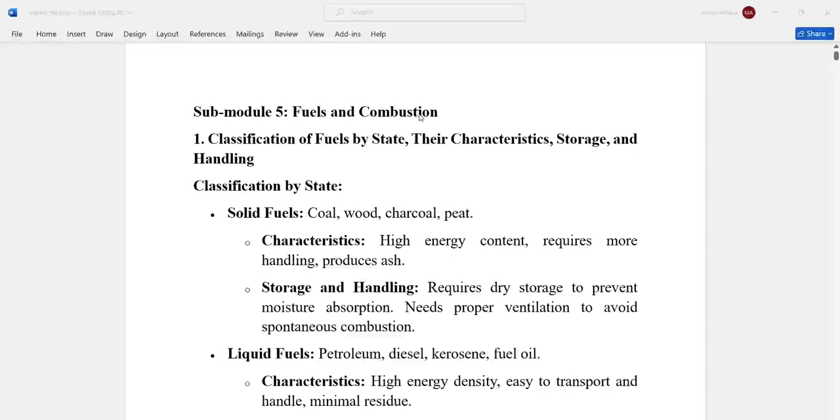Now we are going to discuss fuels and combustion, as an introduction to sub-module 5. By the end of this lecture, everyone should be able to understand what a fuel is, what combustion is, and how to differentiate between solid, liquid, and gaseous fuels. You should also learn how to calculate the enthalpy of formation, how to determine the amount of air required for complete combustion of a fuel, and how to determine any excess air that did not take part in the combustion. I believe everyone will enjoy this.

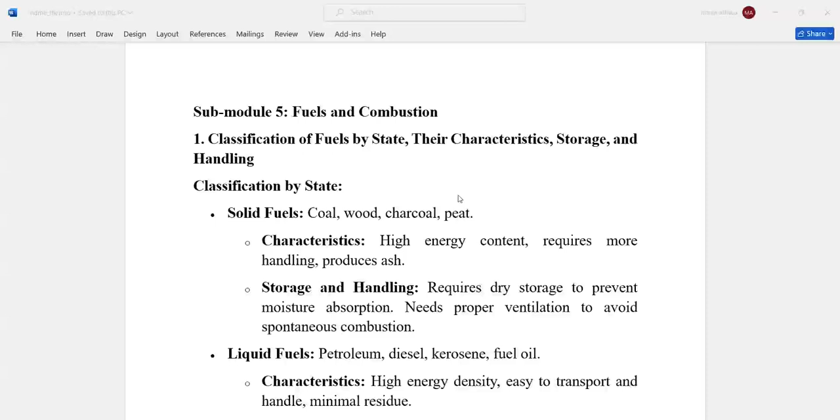Classification by state: first, solid fuels, which include coal, wood, charcoal, and peat. The most common to you are probably wood and charcoal. The characteristics of solid fuels are that they have high energy content, they require more handling since they come in large quantities and become bulky, they require a lot of space to store, and they also produce a lot of ash.

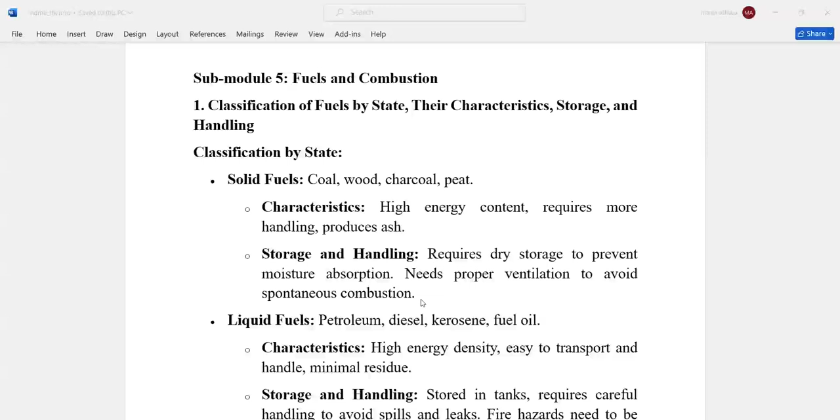For storage and handling, in addition to what we've said, solid fuels require dry storage to prevent moisture absorption, and proper ventilation to avoid spontaneous combustion.

Let's look at liquid fuels. These include, but are not limited to, petroleum, diesel, kerosene, and fuel oil. What is common to you is probably petrol and diesel, kerosene used in lamps for heating and lighting, and diesel and petrol running internal combustion engines for driving or propelling automobiles.

The characteristics are that liquid fuels have high energy density. They are easy to transport because you can put them in cylinders or containers and transport them over longer distances. They also have minimal residues compared to solid fuels, because solid fuels produce a lot of ash, but with liquid fuels like petrol you rarely find residues, except maybe carbon monoxide or black particles left around exhaust pipes of automobiles.

For storage and handling, you can store liquid fuels easily in tanks, but they require careful handling to avoid spills and leaks, which would pose threats of fire outbreaks, thereby destroying property and losing lives.

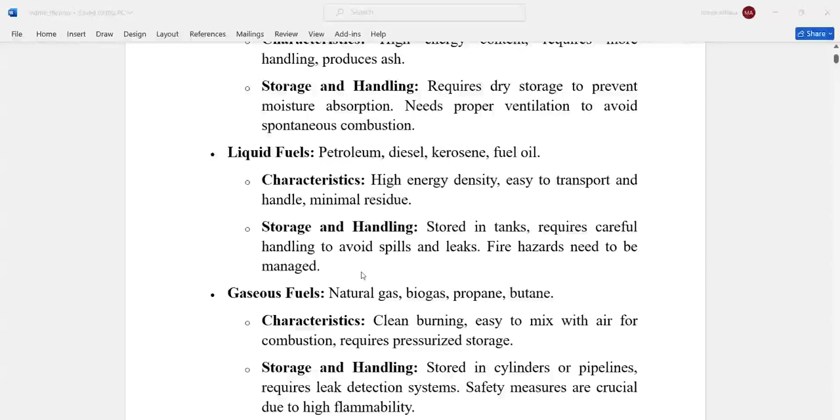Then gaseous fuels, still under classification by state, include natural gas, biogas, propane, and butane. Natural gas, in most cases, is methane, and the liquefied petroleum gas you always use for cooking is one of the gaseous fuels.

Then butane and propane, which we shall see ahead. They are alkanes, belonging to a group of hydrocarbons called alkanes, and we will see how you can differentiate them from other hydrocarbons.

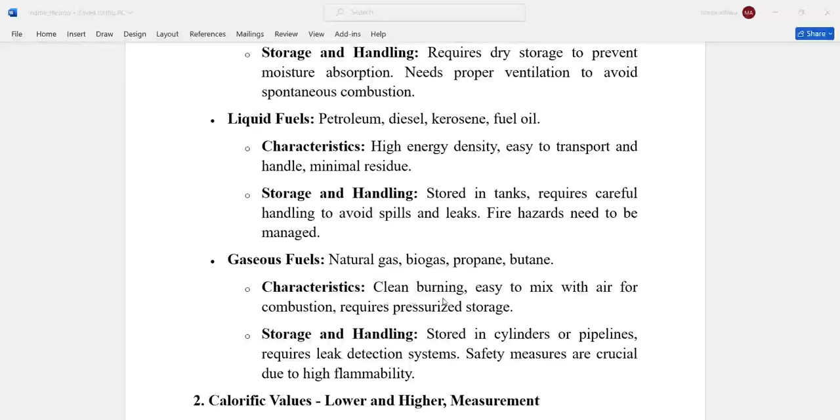The characteristics are that gaseous fuels have clean burning, are easy to mix with air for combustion, and require pressurized storage. That's why you always find gases like LPG in small, highly pressurized cylinders, so you get a safe, controlled release of the gas, allowing it to combine with oxygen or air and burn in the presence of heat, producing the heat or reaction you need.

Out of that reaction, it's the heat you're interested in for cooking, heating, lighting, and to run generators that produce power. Some generators use gas to run their systems, producing either DC or AC power that you can use to run your home and other appliances.

We also find that gaseous fuels are easy to store, since you can store them in cylinders and pipes. But you need leakage detection systems to emphasize safety measures, since gaseous fuels are highly flammable and must never be stored near fire or heat, and must have proper handling.

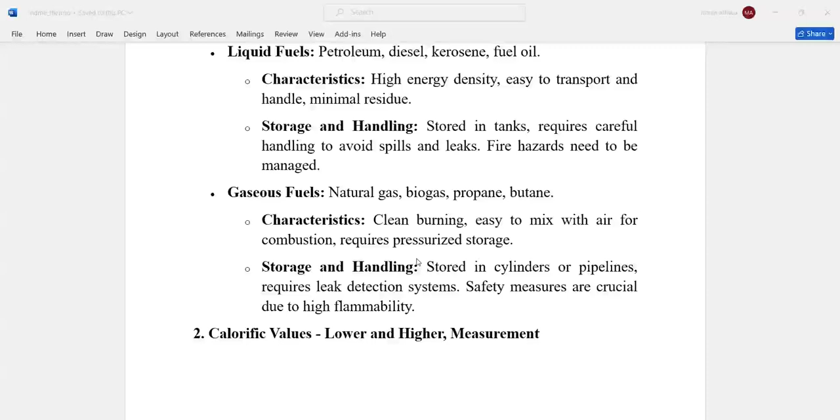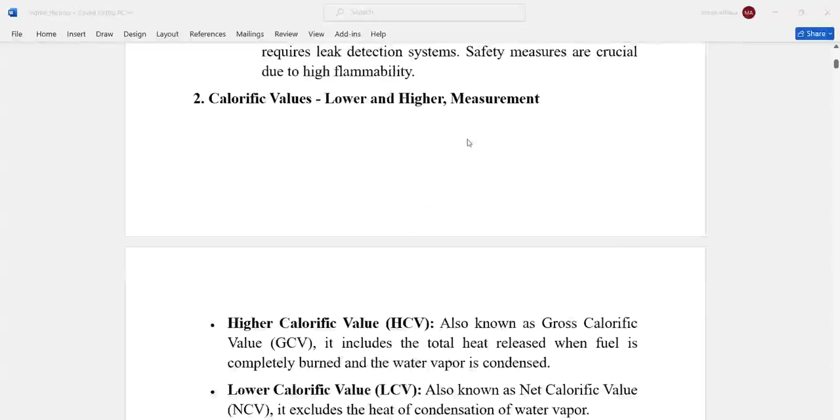Now let's look at the lower and higher calorific values, and their measurement. The higher calorific value is also known as gross calorific value, GCV, and this includes the total heat released when fuel is completely burned and water vapor is condensed.

So you have a fuel that completely burns, nothing is left. All of it is completely burnt, and the water vapor produced out of the fuel is also condensed. So the amount of heat used to condense that water vapor is also included, that's why we call it gross.

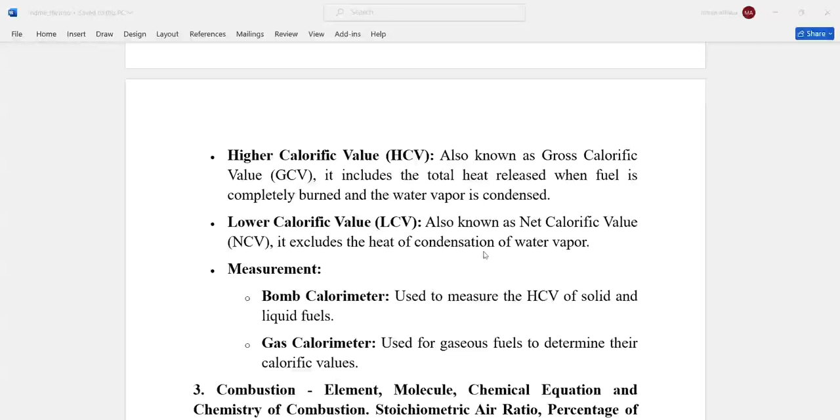But the lower calorific value, or net calorific value, NCV, excludes the heat of condensation of water vapor. So you take the HCV, the higher calorific value, minus the latent heat of condensation of water vapor, and you get the net calorific value.

To measure these two calorific values, you can use a bomb calorimeter to measure the HCV of solid and liquid fuels. Then you can use a gas calorimeter for gaseous fuels to determine their calorific values.

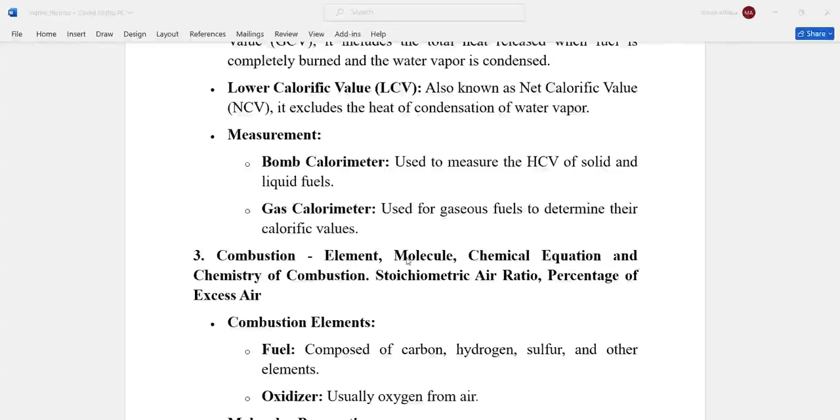Next in our discussion, we are going to look at combustion of elements, and of course we are talking about the fuel. Most fuels are composed of carbon, hydrogen, sulfur, and other elements in their mixture.

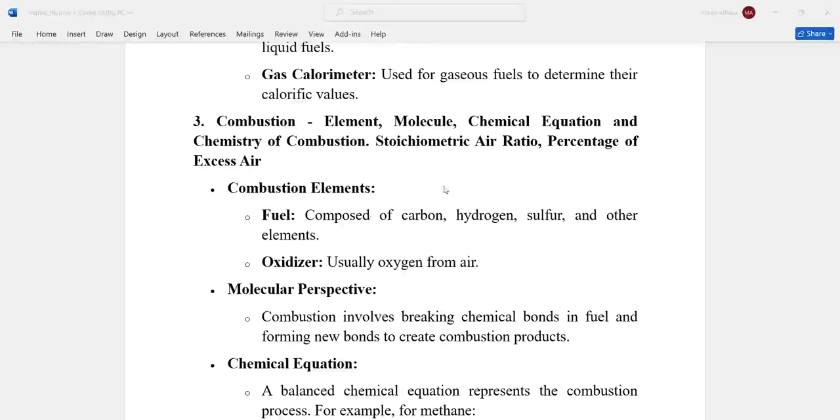You also need an oxidizer, usually oxygen from air, so that in the presence of oxygen and that fuel, and maybe heat, you result in an explosion or reaction that is going to release heat, which you use for different purposes.

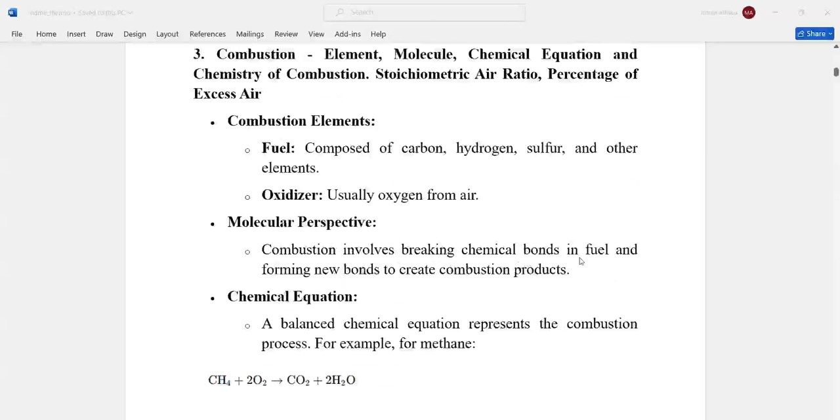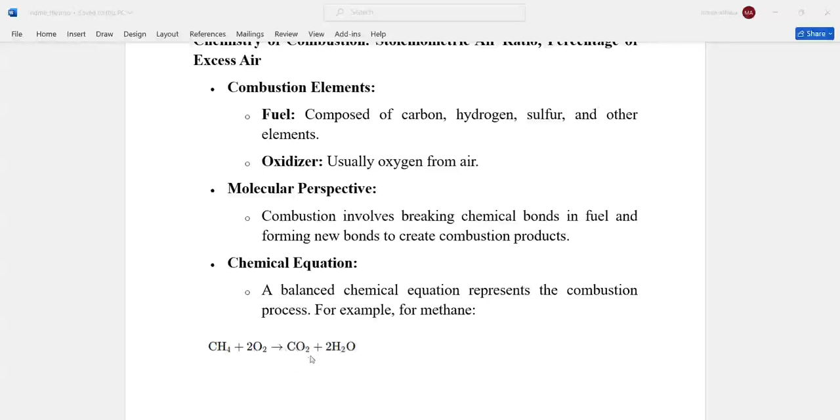From the molecular perspective, combustion involves breaking the chemical bonds in fuel and forming new bonds to create combustion products. For example, methane plus oxygen - methane burning in the presence of oxygen or air - produces carbon dioxide plus water if there is complete combustion of methane.

In case there is incomplete combustion of methane, you will produce some carbon monoxide and water, and you might also have excess oxygen on the other side.

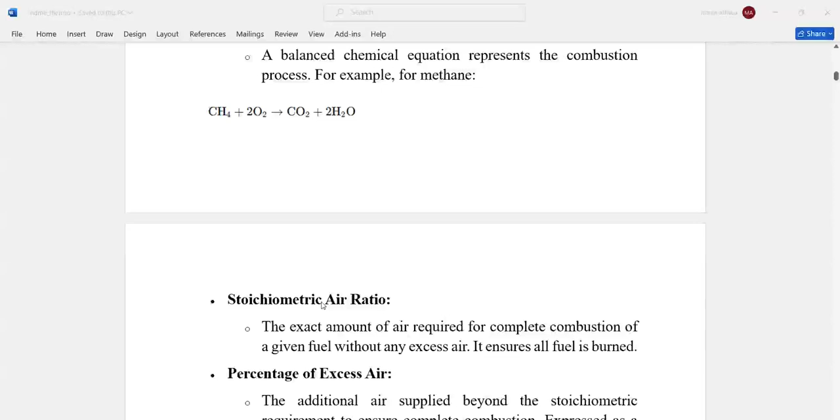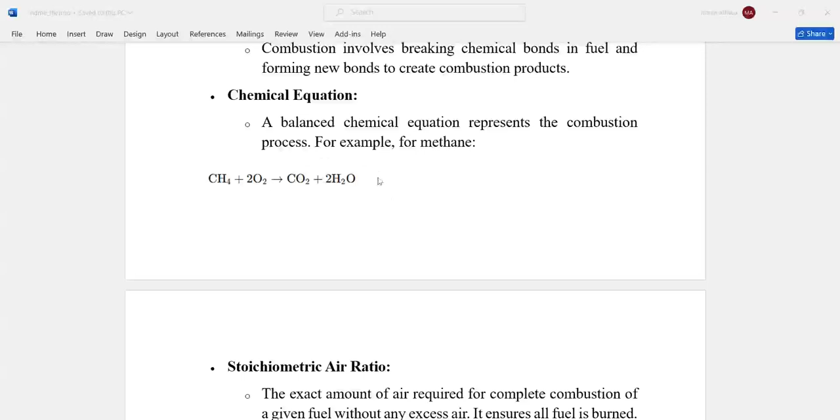To do that, we need to understand what is stoichiometric air ratio, from which we shall go further and discuss the gravimetric and volumetric analysis of the products of combustion.

Stoichiometric air is the amount of air required for complete combustion of a given fuel without any excess air. It ensures that all fuel is burned and there is no excess air remaining.

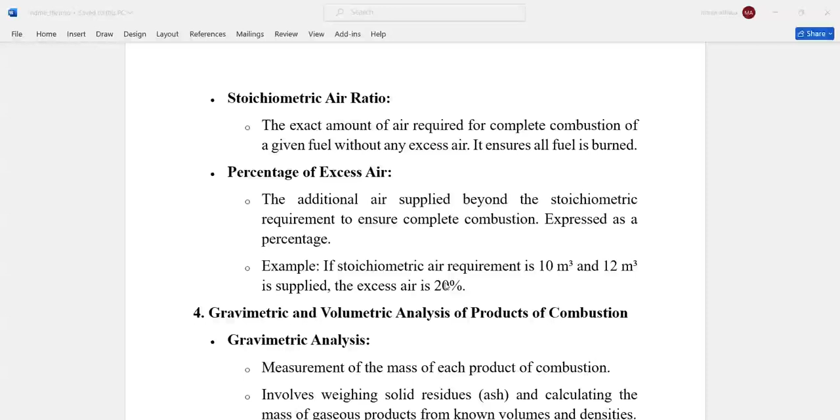To calculate percentage excess air, for example, if the stoichiometric air requirement is 10 cubic meters by volume, and you supplied 12 cubic meters, then the excess would be 2 cubic meters. You divide that 2 cubic meters by the stoichiometric air of 10, multiply by 100, giving 20% excess air in the byproducts of combustion.

Among the byproducts of combustion, you can always find excess air, and determine it by this method. Gravimetric and volumetric analysis of the products of combustion can help us determine the percentage of excess air in the products of combustion, and also the percentage of nitrogen if present.

So the gravimetric analysis involves measurement of mass of each product of combustion, weighing the solid residues, for example ash, and calculating the mass of the gaseous products from known volumes and densities. You can determine the mass of ash because you will be provided with data about the volume and maybe the density, so that you use the relation mass equals density times volume, and then you'll be able to determine that mass.

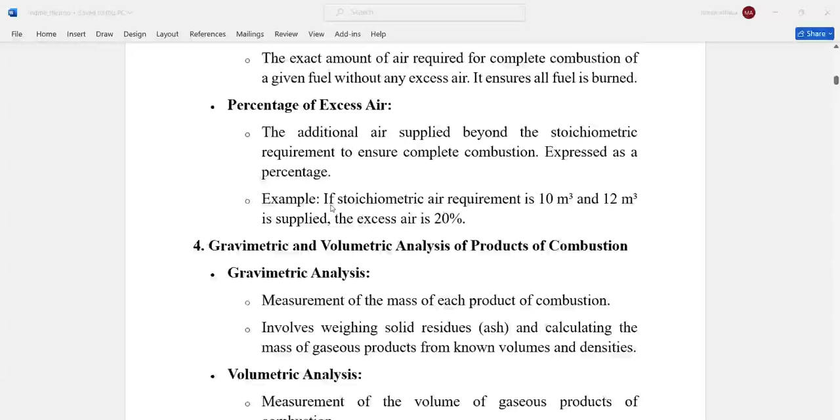Then, of course, you can use that to determine other components, because you have one which is standard that is established, and then you can use it through ratios, using the ratios on the chemical reaction or equation. You are able to determine the mass of those products.

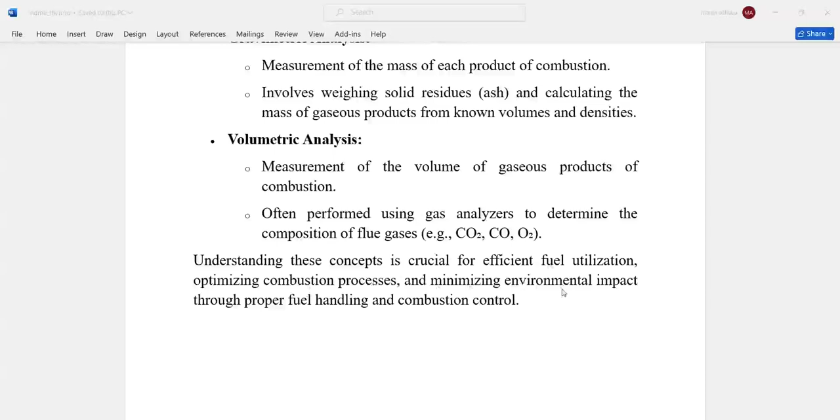How about the volumetric analysis? This is the measurement of volume of gaseous products of combustion, often performed using gas analyzers to determine the composition of flue gases. This can be carbon dioxide, carbon monoxide, and oxygen, of course, which will always be available as excess. Understanding these concepts is crucial for efficient fuel utilization and the optimization of combustion processes, thereby minimizing environmental impact through proper fuel handling and combustion control.

Now I want to look at the several components which, once burnt in the presence of air, are able to produce energy, or are able to produce heat. We will find that when you look at the change in HF...

Change in HF is the standard enthalpy of formation, and this is the change in enthalpy or change in heat energy when 1 mole of a compound is formed from its elements in their standard states under standard conditions. And we are talking about 25 degrees Celsius and 1 atmosphere of pressure.

The standard state of a substance is its most stable form at 1 atmosphere and a specified temperature, usually 25 degrees Celsius.

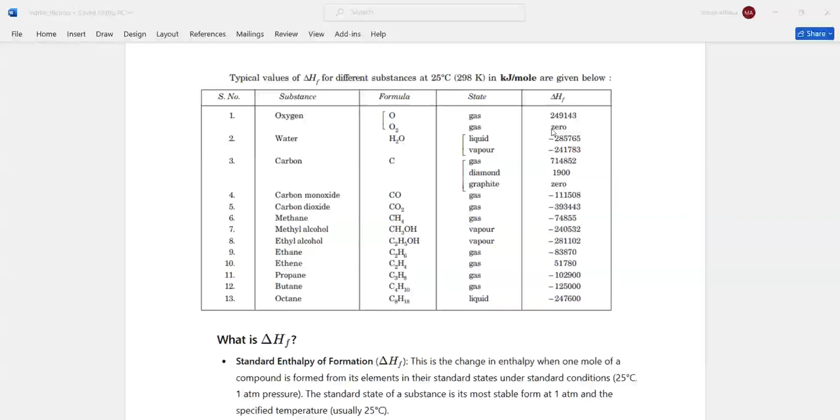Now, when you look at this table, you realize oxygen as an atom, for example, has the enthalpy, the change in the enthalpy of formation as this one in kilojoules per mole. Then when it comes to oxygen gas itself as a molecule, you'll find that the standard enthalpy of formation is 0.

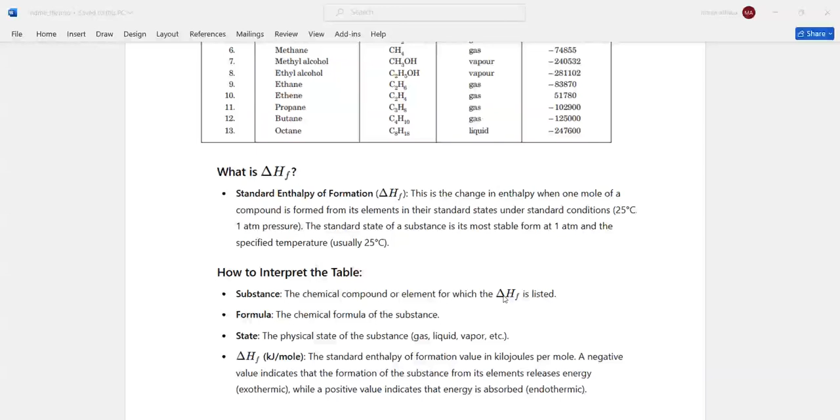Why? We see that for the chemical compound or element for which HF is listed, you'll find that the enthalpy of formation value in kilojoules per mole, a negative value indicates the formation of a substance from its elements.

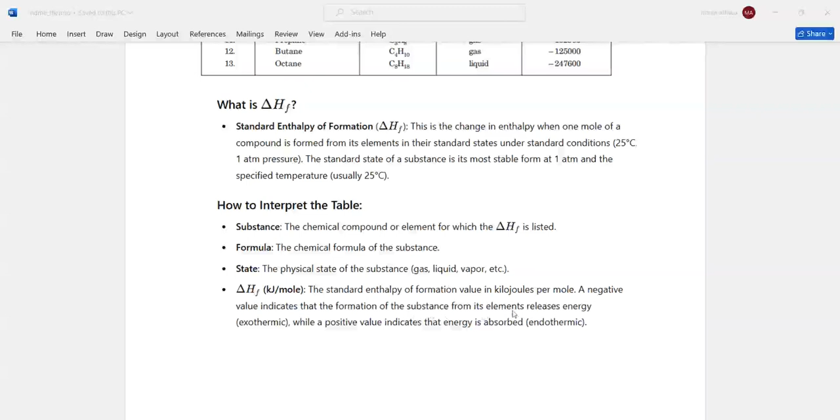And this reaction will release energy, that is exothermic. If the reaction gives you a negative HF or negative value of enthalpy of formation, then that reaction is releasing heat to the surroundings. But if it is positive, then it is going to absorb heat from the surroundings.

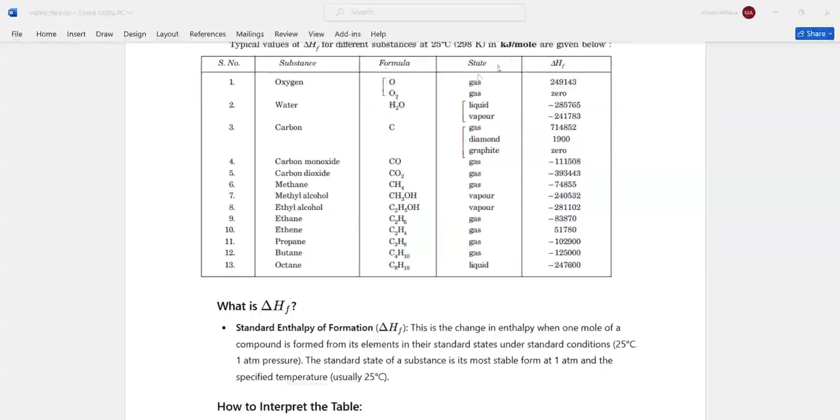So for example, if you are to combine oxygen atoms to produce oxygen gas, then you would need to absorb heat, that is an endothermic reaction, to produce the product you are looking at. Now, if it is existing in its standard form, then the enthalpy of formation is going to be 0. So we are saying that oxygen as a gas in the form of a molecule has a value of 0 kilojoules per mole because it is in its standard state.

Oxygen in its standard form is existing as an oxygen molecule, and we are saying at a temperature of 25 degrees Celsius and a pressure of 1 atmosphere, we are able to have that oxygen as a molecule.

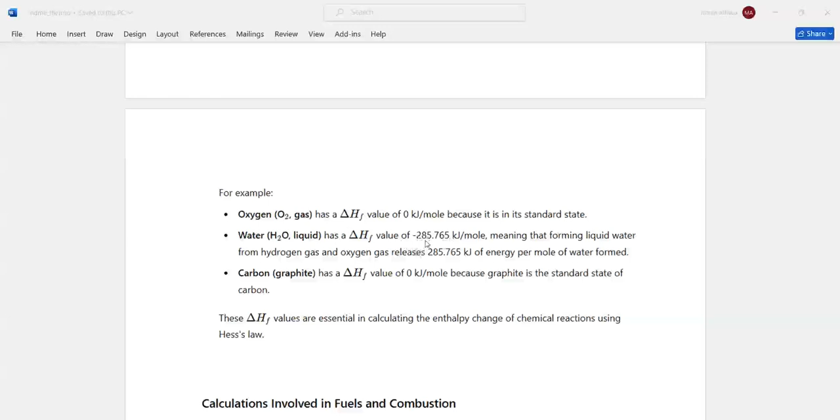Then, now water, if we find that we are forming water, liquid water, and its enthalpy of formation is negative, it means in the formation of water from hydrogen and oxygen, we are going to release heat to the surrounding, equivalent to negative 285.765 kilojoules per mole. And if we look at carbon or graphite, it has a value of 0 kilojoules per mole because graphite is the standard state of carbon.

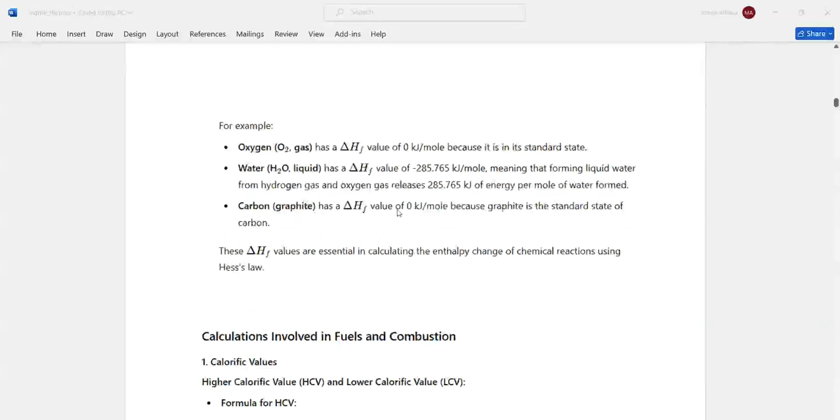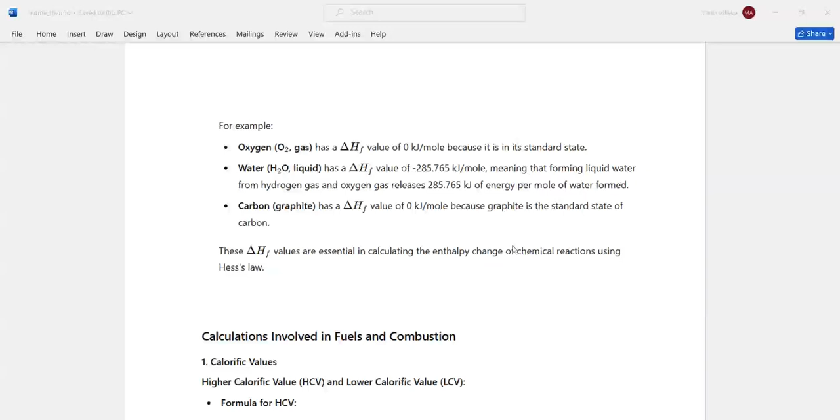So this can exist as graphite or as carbon at 25 degrees Celsius and 1 atmosphere of pressure. So these values that you see here are very essential in calculating the enthalpy change of chemical reactions using Hess's law. We shall see it as we go ahead.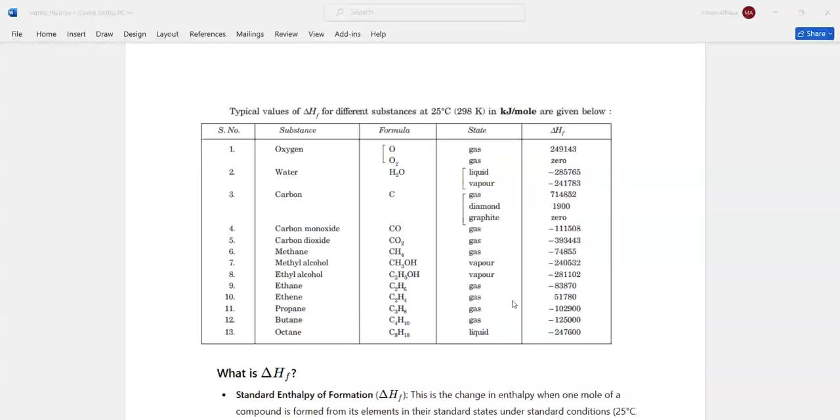If you are forming ethene, it is an unsaturated hydrocarbon. It has a double bond somewhere. So forming it would require indeed absorption of heat. And this kind of formation of ethene is an endothermic reaction, which is identified or represented by a positive standard enthalpy of formation.

So let's go and look at how we can calculate the higher calorific value. We need to know that HCV is equal to Q divided by M, whereby Q is the total heat released during combustion and M is the mass of the fuel.

Now, what about the net calorific value or the lower calorific value? It is equal to HCV minus the latent heat of vaporization of the water vapor produced.

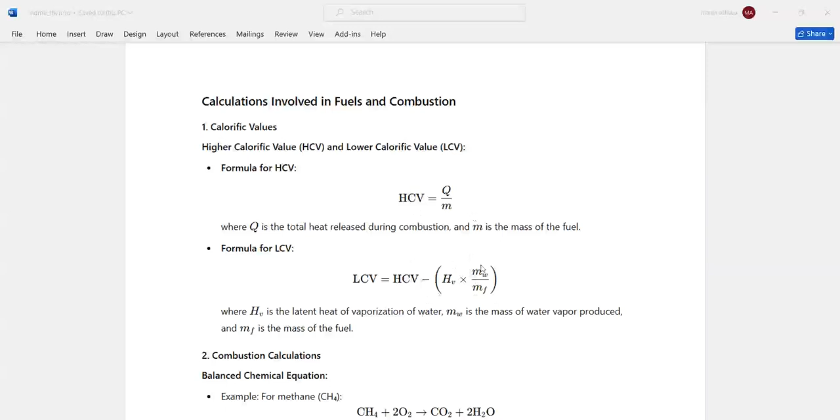That's why we get HCV minus this formula, because it helps us calculate the heat of vaporization of the water vapor. Since you already have the HCV, given values such as the latent heat of vaporization of water, which may be standard, you may need to determine the mass of water and then the mass of the fuel.

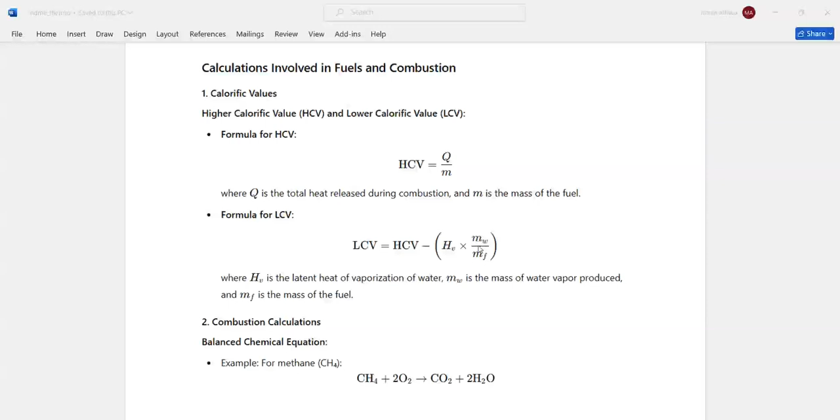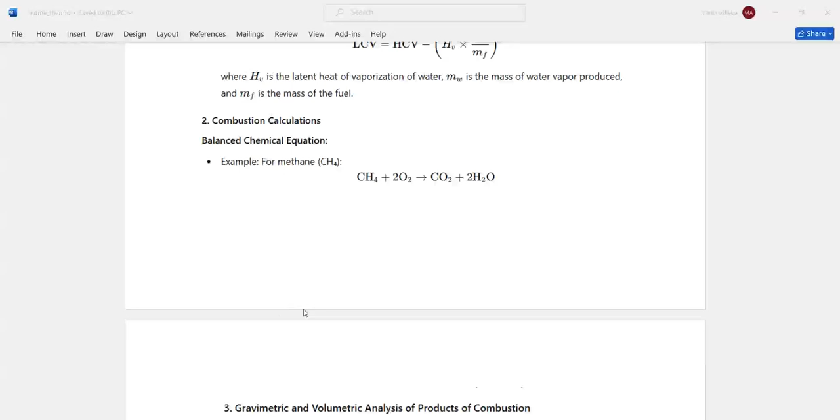So if we are balancing, before we have these twos here, you first have the standard equation: CH4 plus oxygen giving you carbon dioxide plus water. Then in balancing, you'll see carbon atoms, one this side and one this side, which is fine. Then the hydrogen atoms are 4 on one side and 2 on the other.

So I look for a value to write here so that the hydrogen atoms become 4. So 2 multiplied by 2 gives you 4 hydrogen atoms. Now the hydrogen atoms are balanced, and you move to oxygen.

When you put 2 on water, it also affects the oxygen here, so it becomes 2 oxygen atoms. Here you have 2 oxygen atoms, which become 4. On the other side you have 2, so what can you write here so they become 4? Obviously, it will be 2. Then your equation is balanced.

You can't proceed with any calculation if the equation is not balanced, because you won't produce the right amounts of the combustion byproducts.

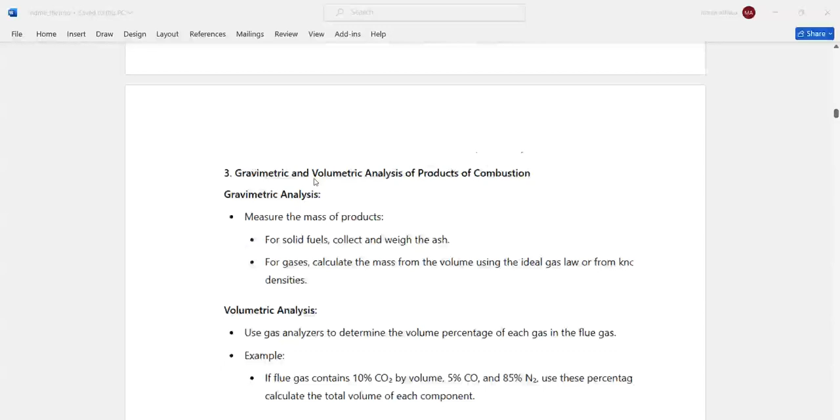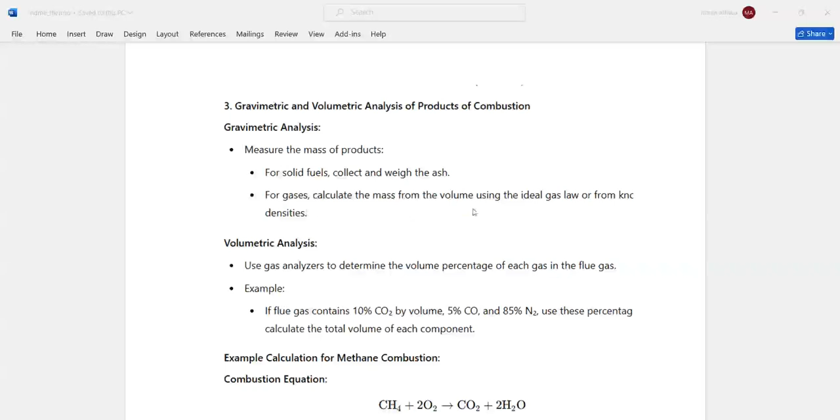Now, what about the gravimetric and volumetric analysis of the products of combustion? We said you have to measure the mass of the products. For solid fuels, you can collect and weigh the ash. For gases, you can calculate the mass from the volume using the ideal gas law, or from known densities, and then you'll be able to calculate the gravimetric proportions of the products of combustion.

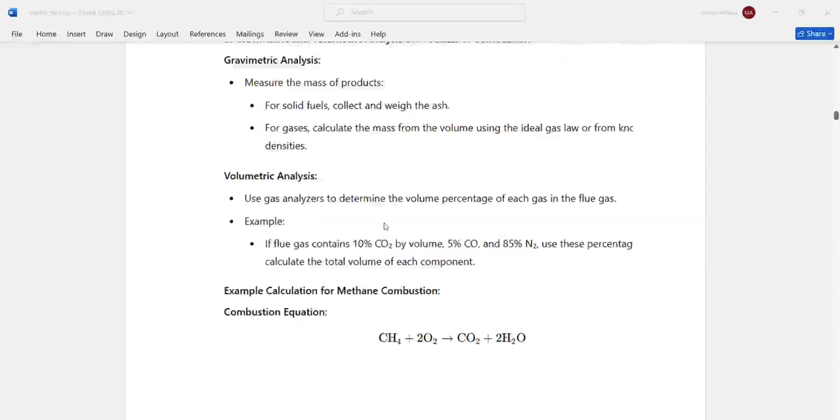For volumetric analysis, obviously you do this on gases, using gas analyzers. If a flue gas, the byproduct of combustion, contains 10% carbon dioxide by volume, 5% carbon monoxide, and 85% nitrogen, you use these percentages to calculate the total volume of each component. So first you write the chemical equation, balance it, and proceed.

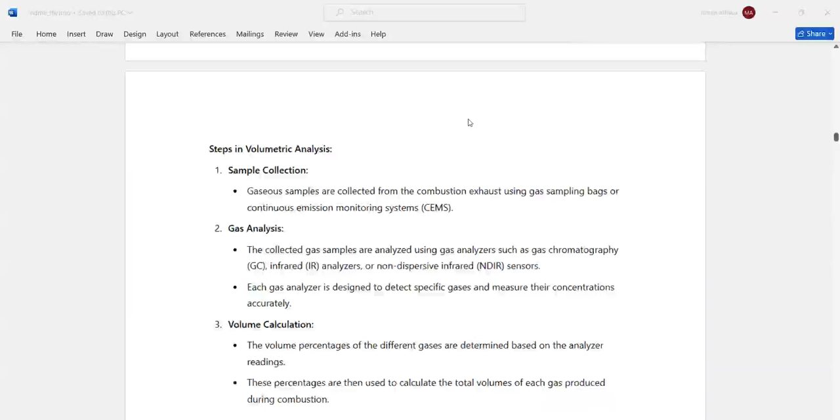The steps in volumetric analysis: you need to collect the sample, then do the gas analysis using gas analyzers such as gas chromatography, infrared analyzers, or non-dispersive infrared sensors, and then analyze the samples that have been collected.

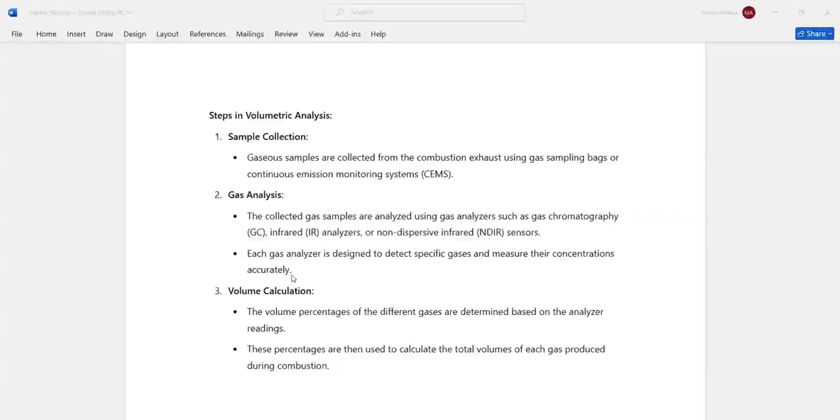Each gas analyzer is designed to detect specific gases and measure their concentrations accurately. You might have a sensor that detects a wide range of gases, but you'll find specific gases have their own sensors. It will detect the type of gas present and also give its concentration. If it is carbon monoxide, it will tell you it is carbon monoxide, and also the proportion of it in the sample passing by the sensor.

Then the volume calculation: you determine the volume percentages of the different gases based on the analyzer readings. These percentages are then used to calculate the total volume of each gas produced during combustion.

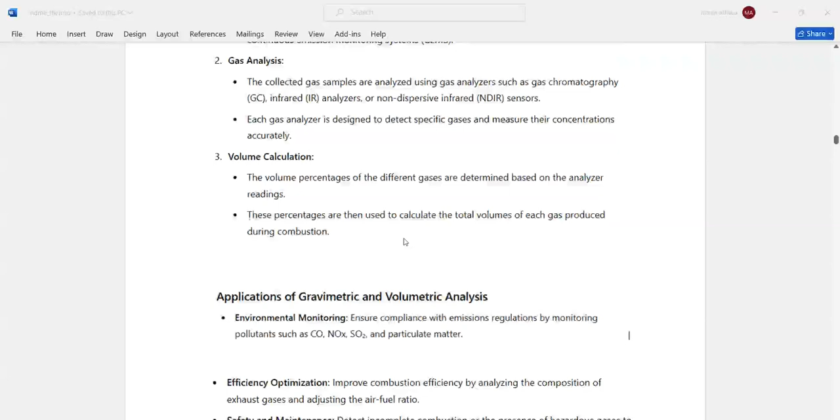So where do we apply gravimetric and volumetric analysis? We do this in environmental monitoring to ensure compliance with emissions regulations, by monitoring pollutants like carbon monoxide, NOx, which is the oxide of nitrogen, so it can be nitrogen dioxide, then sulfur dioxide, and particulate matter.

Efficiency optimization: we apply gravimetric and volumetric analysis for efficiency optimization to improve combustion efficiency by analyzing the composition of exhaust gases and adjusting the air-fuel ratio. For example, if you look at the exhaust pipe and determine how much carbon dioxide is being produced, that would help you check your air-fuel mixture if it's a petrol engine, and thereby improve the combustion efficiency of that engine.

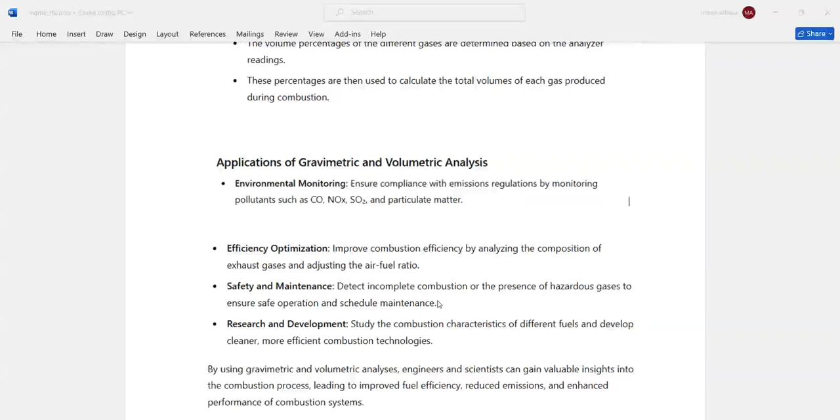Safety and maintenance: you detect incomplete combustion or the presence of hazardous gases to ensure safe operation and schedule maintenance. Take an internal combustion engine example: if there is incomplete combustion of the fuel, you produce a lot of carbon monoxide. If you detect this carbon monoxide before it goes to the environment, you work on it, thereby ensuring safety and maintenance of your engine and the system, and protecting the environment from hazardous gases.

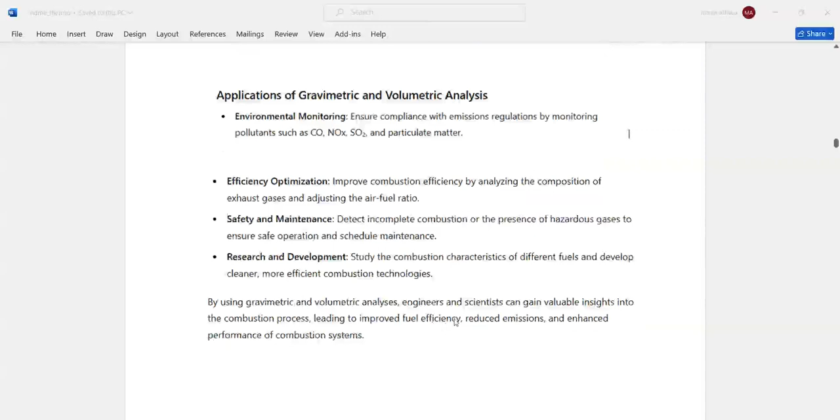Research and development is also important because you need to look at the combustion characteristics of different fuels and develop cleaner and more efficient combustion technologies.

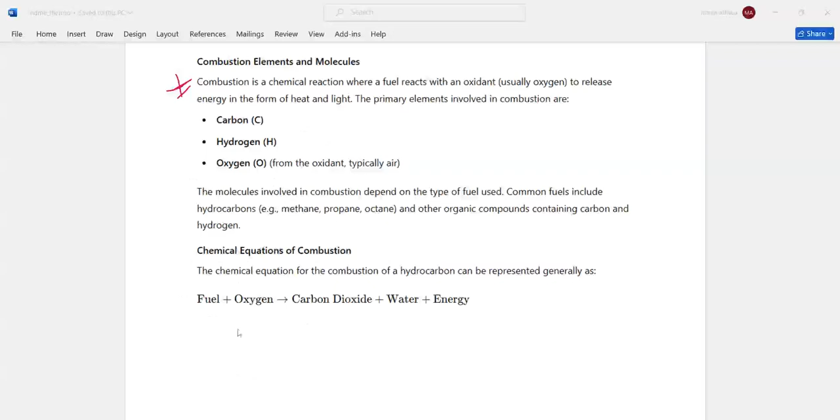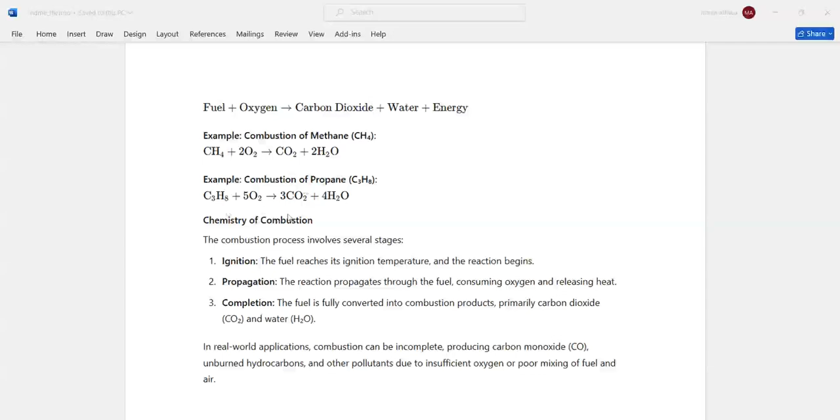Let us look at the chemical equations of combustion in simple terms. You'll have a fuel and oxygen, then you produce carbon dioxide plus water plus energy. As simple as that, because the fuel is composed of carbon, hydrogen, and maybe some oxygen, with the oxidant being air, plus other substances in the fuel. So you add the oxygen, then you produce carbon dioxide, water, and energy. Look at those reactions for methane, for propane, and you can also do one for butane. Then balance them, and see how well you can handle such equations if they required you to make some computations.

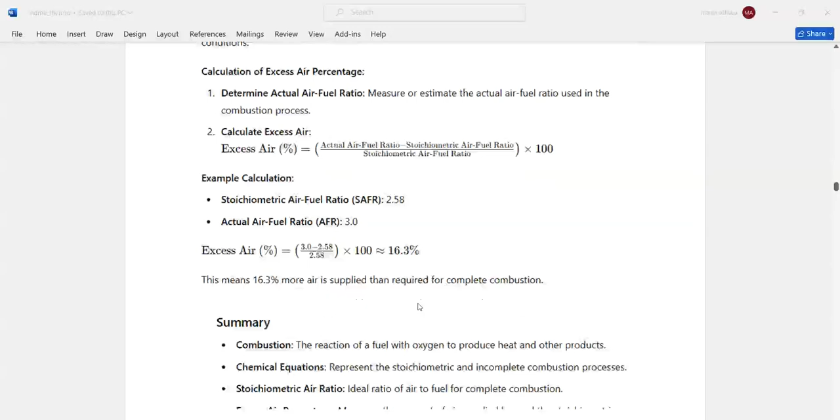Earlier I told you how to calculate the percentage of excess air. To calculate excess air, you need to determine the actual air-fuel ratio, then subtract the stoichiometric air-fuel ratio. When you get that value, you divide it by the stoichiometric air-fuel ratio. For example, if the stoichiometric value is 2.58, and the actual fuel ratio used is 3, then 3 minus 2.58 divided by 2.58, multiplied by 100, gives an excess air of around 16.3%. So it means 16.3% more air is supplied than required for complete combustion.

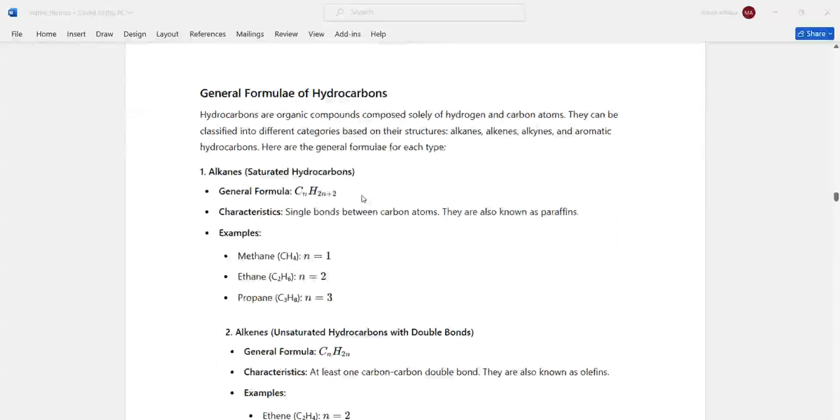I want to take you through the general formulae of the common hydrocarbons, which you need to at least have a glimpse of and understand. One is alkanes: these are saturated hydrocarbons, and they have the general formula CnH2n+2. Methane has one carbon atom, so N is the number of carbon atoms. If N is 1, you get C1H(2x1+2), which becomes H4, C1. But putting the 1 would look funny, so we leave it as CH4, and that is methane.

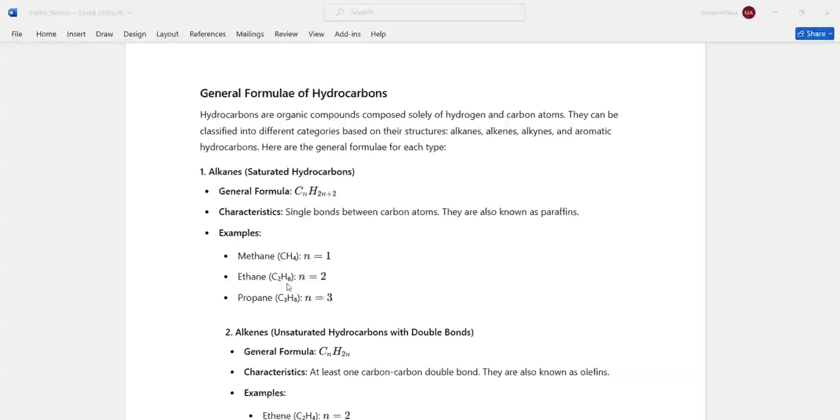For ethane, there are 2 carbon atoms, so substituting in the formula you get C2H6, and that is ethane. Propane would be C3H8. Try it for butane, try it for pentane, and you'll enjoy it.

Then we look at the alkenes. These are unsaturated hydrocarbons, and they have the general formula CnH2n. If ethene has 2 carbon atoms, substituting gives C2H4. Propene has 3 carbon atoms; substituting in the formula gives C3H6, and so on and so forth.

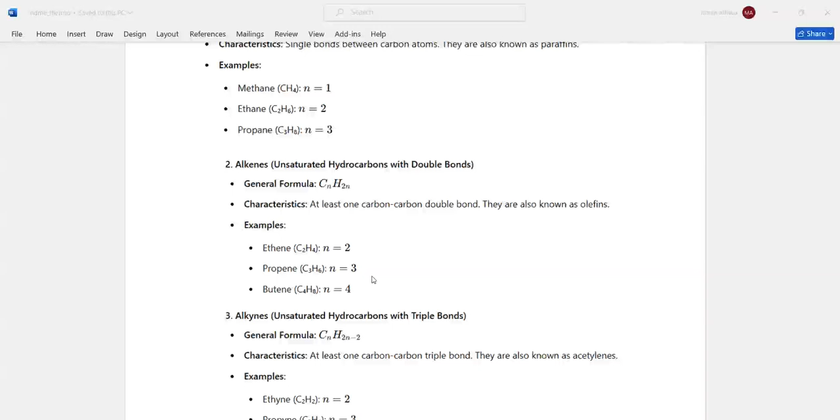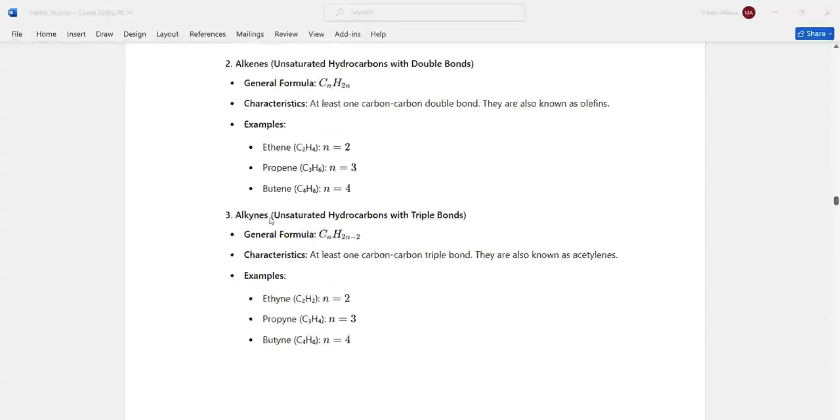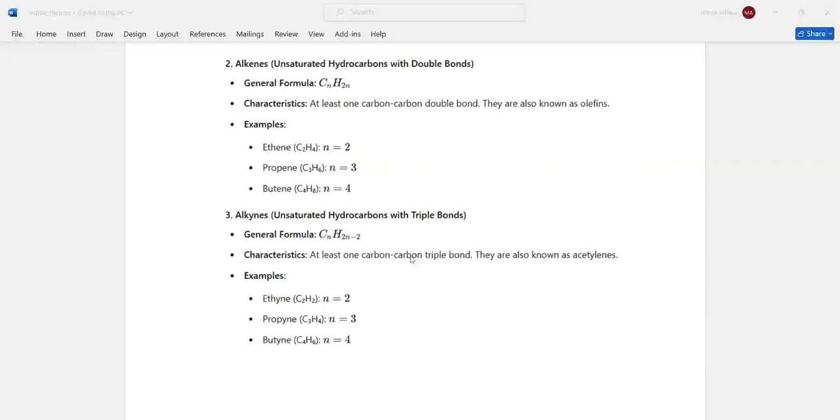Then the alkynes: the alkenes have double bonds, while the alkynes have a carbon-carbon triple bond, with the general formula CnH2n-2. The first one we take is 2 carbon atoms, which is ethyne. Substituting gives C2H(4-2), so C2H2. Propyne would give you C3H4. Try it for butyne, try it for pentyne.

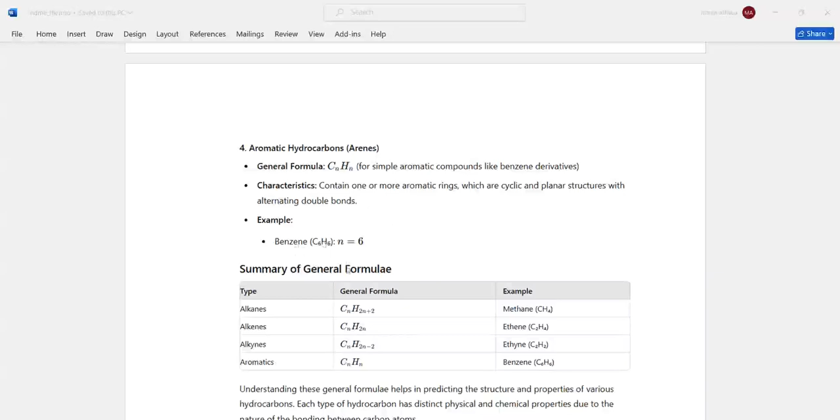Then we have the aromatic hydrocarbons, also called arenes, with the general formula CnHn. These are the simple aromatic hydrocarbons. Take the case of benzene: this is C6H6, and that gives you benzene.

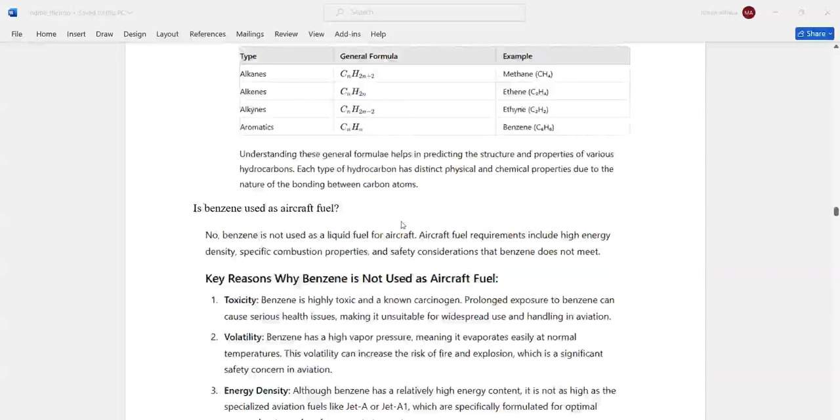So we have talked about all those in summary: the alkanes, alkenes, alkynes, and aromatics. Now I wanted to pose some questions, but I think I'm going to make another video so we can proceed from there. Thank you so much.